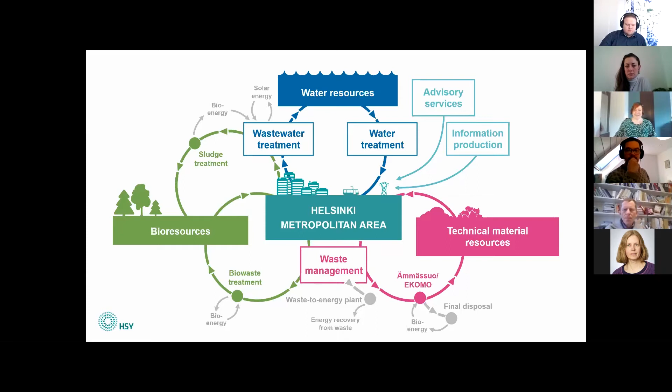The strategy of HSY is to be an enabler of clean and sustainable urban environment. And the most important part from my point of view is that we try to be a forerunner in environmental responsibility and resource efficiency in Finland. And that includes actively taking advantage of new technologies. That's where I come in.

I'm working as the research and development portfolio manager at the waste management sector of our organization. But I work closely with the wastewater management people as well. So we have joint projects, which this is one example of.

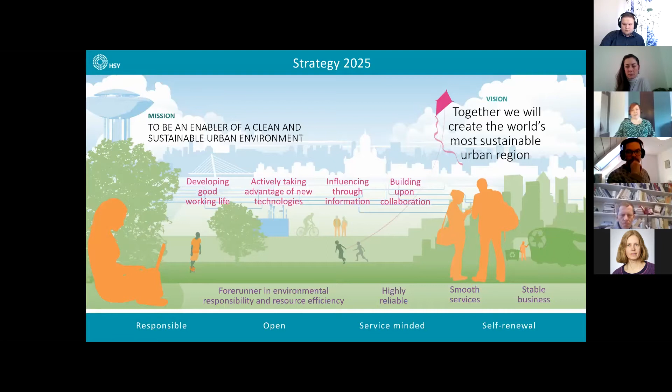The big vision that we have about resources from wastewater is that there's two parts of a bigger project. One part is the Ravita process, which is developed by HSY, and the main goal of the process is to capture phosphorus from wastewater without it entering the sludge.

So the phosphorus is not precipitated in the early stages of the wastewater treatment process as it is usually done, but instead as a post-precipitation process, and thus it doesn't go into the sludge. That's about 70% of the phosphorus, and then 30% goes into the sludge.

Biologically, there's no iron in the sludge in that case, and that's where we come in and we do the pyrolysis to get rid of any pharmaceutical residues or microplastics and so on, and produce a char. But this is all still at the pilot stage, so we don't have a working Ravita process at the moment.

The current project that we are in is going to scale the process up in a smaller wastewater treatment plant in Finland, because ours are quite big and we can't risk trying new things because the water volume is big and we are right at the Baltic Sea, so we are very strict about our limits, and we are very conservative in that sense.

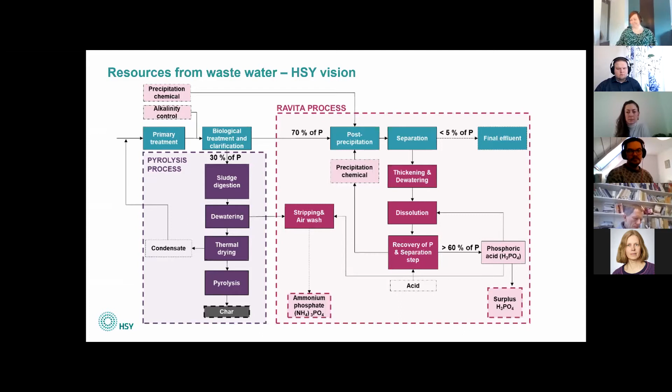Some background on why we went into the project of looking into new technologies. One big issue is windrow composting, which is the normal way of treating wastewater sludge. It consumes a lot of space, and it produces a lot of odors.

Our site at the Ämmässuo Waste Treatment, or Eco Industrial Center, has two municipalities on either side, and they are both growing. So we get more and more neighbors, and when we get more and more neighbors, we get more and more complaints about smells. And we wanted to look into alternatives that would reduce the need for space, and especially reduce the odors that come.

So, more controlled processes for treating wastewater sludge. We started in 2015 with a project where we gave a big shout out, trying to get companies to answer us on how we should treat this stuff.

And we got many answers, of which then 4 were selected for testing. The criteria was that it must be suited for digested and centrifuged sludge, because that was the sludge that came to the Ämmässuo Center, and we didn't want to mess with the process at the wastewater treatment plant.

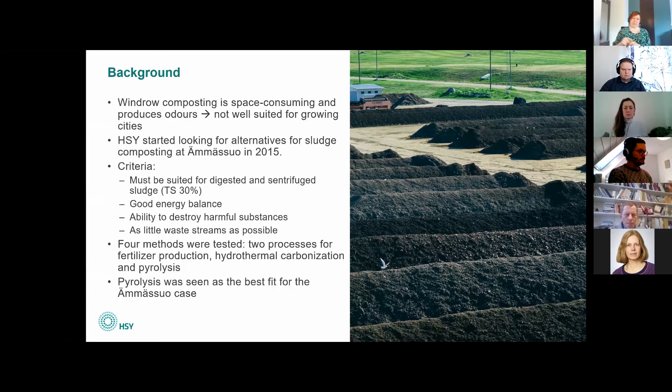So pyrolysis in sludge management, the high temperatures ensure the destruction of pathogens and also organic contaminants. Organic contaminants are things like medical residues, fire retardants, and microplastics.

We don't have any analytical methods yet for determining if microplastics are indeed evaporated from the SludgeChar. We can test the sludge for microplastics, but there is no analytical method at the moment to test the char. But with the temperatures that we use, I am quite confident, and so are many experts, that the microplastics will also be evaporated and then burned with the syngas. As soon as we have a method for this, we will be using it.

The remaining char is mainly composed of carbon and, at the moment, iron. As I said, when we get the Ravita process running, then we won't have that iron in there. There's also quite a lot of phosphorus and then calcium.

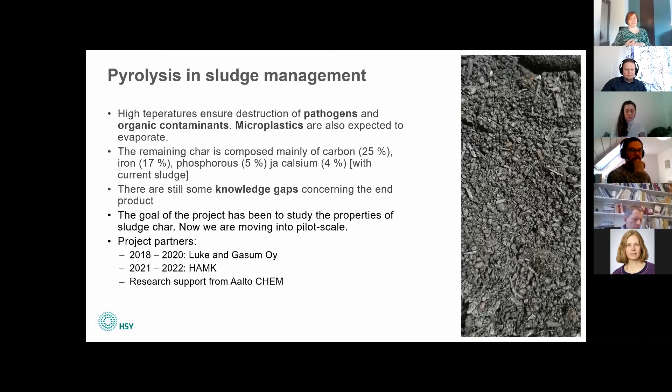In 2019 we did some pyrolysis test runs at the Gasum facility. At that point they owned a small, sort of pilot scale pyrolysis facility in Turku. We tried our sludge and their sludge, and there's a bit of difference between the sludges. We dried them using a vacuum dryer, and pyrolyzed them at two different temperatures to see if there's any differences between the temperatures. We took samples before and after pyrolysis, so we had samples of dried sludge and then the pyrolyzed sludge that we call SludgeChar.

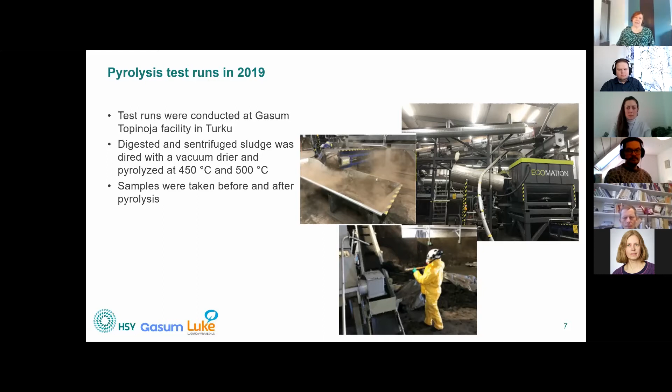What we studied from them was the chemical composition, so what nutrients they had, if there were heavy metals, pH, electrical conductivity, and organic contaminants. Then we wanted to look at the structure of sludge-derived biochar. As we know, wood-derived and other plant material biochar has a very porous structure. We were expecting this not to have as much porous structure, and we know these structures are relevant when we use biochars in different applications. So we wanted to look into that to compare it to conventional biochars.

Then we wanted to look at the sludge-derived biochar as a fertilizer. So if it isn't a proper biochar, could it then be a fertilizer? We were also adding nitrogen to the end product because that will evaporate in the drying process. Then one interesting application for us was using it as a composting amendment. We had tried biochar earlier with good results, and we wanted to compare the SludgeChar to this conventional biochar.

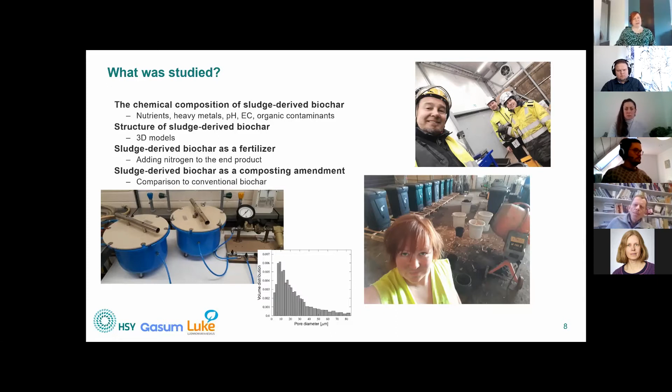With the new EU Fertilizer Act, copper and zinc are quite close to the limit values and exceed them at times, so we need to look into these more closely if we want to use this as a fertilizer product.

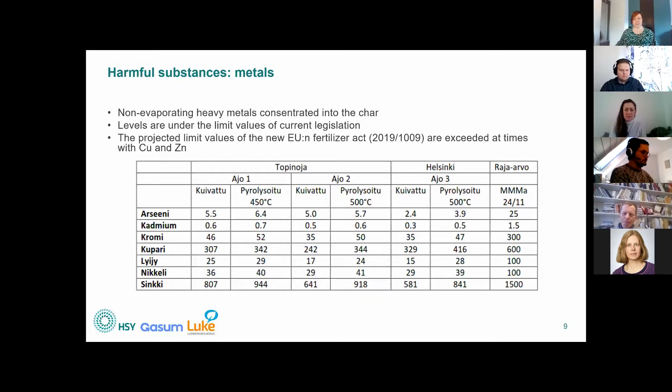For organic contaminants, we tested for 174 different organic contaminants. There was a long list of fire retardants, plasticizers, drugs, pharmaceuticals, hormones, and so on. Most organic contaminants were eliminated or reduced very significantly. As you can see here, BDE and PFOS are examples of that, and diclofenac is here as an example of pharmaceuticals.

That's one of the most concern-raising pharmaceuticals, because it is very bad for aquatic environments at least, and we saw it disappear completely, which is very, very nice. Paracetamol, for some reason, is the exception. It is increasing in concentration with this heat treatment, and we've seen this in other projects as well.

One educated guess I've heard is that when people consume paracetamol, it degrades in our bodies into other products, and these products might, in the presence of heat, turn back into paracetamol. That's quite interesting, but fortunately it's not one of the most concern-raising pharmaceuticals out there, so we're not very worried about it, but it's an interesting outlier that this can happen.

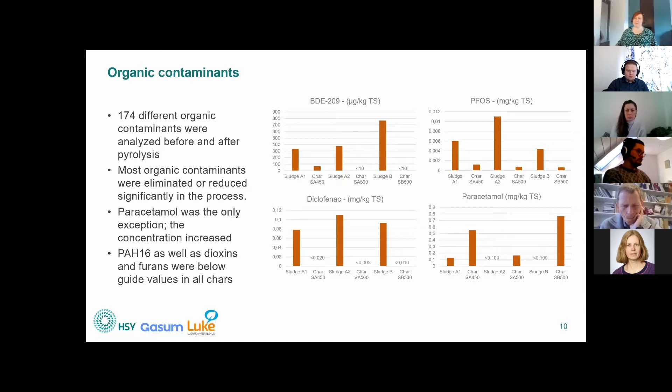Nutrients: phosphorus concentrates into the char, so it doesn't evaporate or turn into anything else. It constitutes about 5% of the end product. Due to the iron in the sludge, the phosphorus is quite low, and the solubility is quite low.

We expect this to change with possible new sludge in the future. At least we hope so, and this is something we're going to test soon, trying to get our hands on some biologically treated sludge with biological phosphorus removal, that we can then pyrolyze and study. Unfortunately, biological phosphorus removal is not very common in Finland, as it mainly works only in warm temperatures, so it can only be used in summer, and it's not as secure as removal of phosphorus with iron substances, chemical removal. That's why it's difficult to find sludges to study, but we have now located some, and we'll try it.

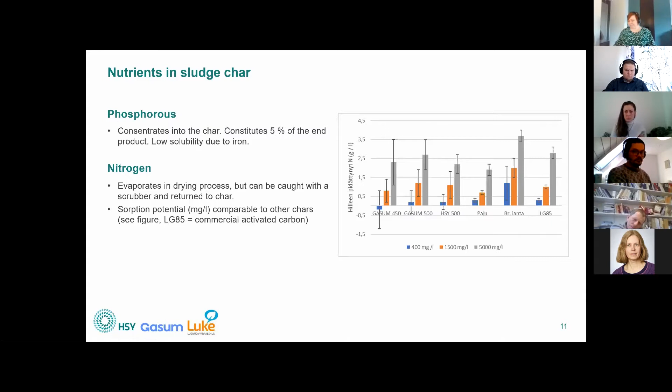Then into the structure. As we expected, the porosity of the SludgeChar is quite a lot smaller than the porosity of wood-derived biochars. You can see in the picture, Lietehiili is SludgeChar, and Pajuhiili is willow char, and you can well see the difference for yourselves there.

The surface area of chars is a crucial parameter for many conventional uses of biochar. If we're using it, especially in the composting process, where bacteria use all these holes as their homes and grow there, then SludgeChar is obviously in a negative disposition there. Water holding capacity is another thing—with this low porosity, the water holding capacity is of course also smaller.

Here in the picture there's the pore diameter, but then there's also picture B, and there you can see that the pores in SludgeChar were actually these sort of balls. We're thinking this is because of the water evaporating and leaving these holes, so that might be due to the drying process. It was a vacuum dryer, so it might have created small explosions of water inside it, leaving some ball-like structures in the char. We now have a different drying process, and I hope I can get new, similar pictures to see if that affects the structure.

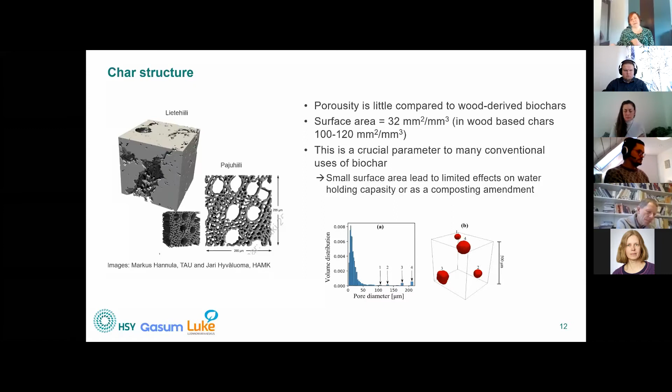And then what we are doing now is looking at SludgeChar in anaerobic digestion of biowaste. We saw that composting the material is quite dense, and it can create pockets in composting that are sort of anaerobic.

And thus this might be a better use for it. We have done some tests, and the results so far are promising. It seems that SludgeChar has a stabilizing effect on anaerobic digestion of biowaste, because biowaste is really nitrogen rich, and it's not an easy feed for digestion. These processes are quite prone to collapsing for different reasons.

If you drive it too hard, it can collapse easily, and it seems that SludgeChar is actually helping the process to keep stable.

It also does seem to have an effect on the end product. The fertilizer that comes after the anaerobic digestion - it seems that the nitrogen in the end product is more readily available for the plants. You can see the salad on the right there, and the third from the left is the SludgeChar version. As you can see, the roots of the salad are quite a lot better compared to the control with no fertilizing, then there was biowaste digestate without the char, and then a commercial fertilizer as a control as well.

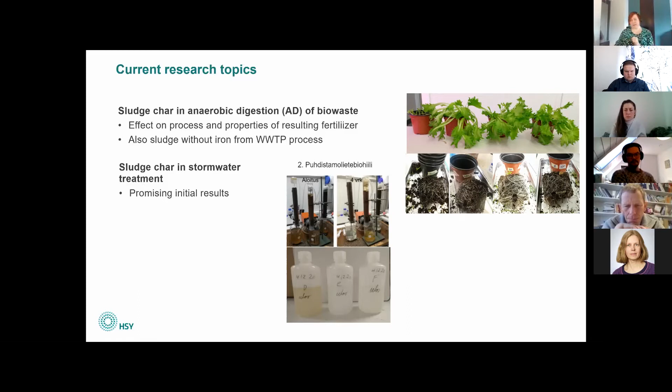And now to the pilot facility. In view of promising results on the chemical composition of SludgeChar, we are confident that this is a good technology for us, and we are now piloting it. We have built a pilot plant, which is about 10% capacity of a complete plant that we would have.

What we want to do is first of all secure the operation across the whole process, because drying of sludge is one big question mark - what the best technology for that is. And then, of course, there are a few sludge pyrolysis plants already out there.

But now with this design, we wanted to get a design that's not screw-based, but is actually a drum reactor, because that we can scale up more easily. If you have screw reactors, scaling up is basically just putting them next to each other, and we'd need at least, I think, 7 reactors to cover the need for treatment that we have.

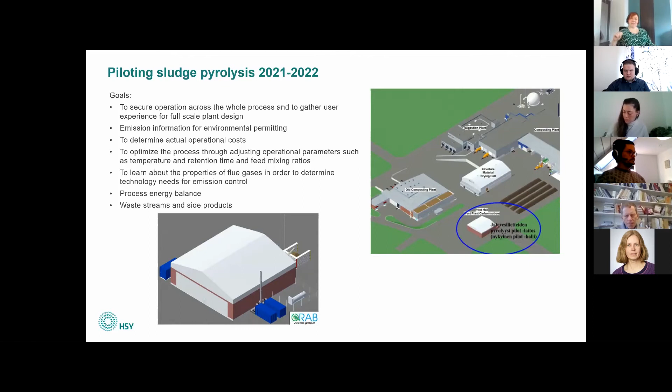Here's a closer look at the plant before we watch the video. It starts with numbers 1 and 4, which are bunkers - 1 for sludge and 4 for wood chips. They are mixed and conveyed to number 6, the big blue thing, which is the belt dryer. They slowly move through the belt dryer, and once dry, go into a buffer hopper, or buffer silo, number 9, and from there to the actual pyrolysis reactor, number 11.

There the syngas is then burned, and there's a thermal oil system that captures the heat from the incineration of the gas and transfers that to the drying process.

And then in the end, the char is quenched with water or the ammonium sulfate that we get from cleaning the air of the drying process, and then stored outside in a storage pit.

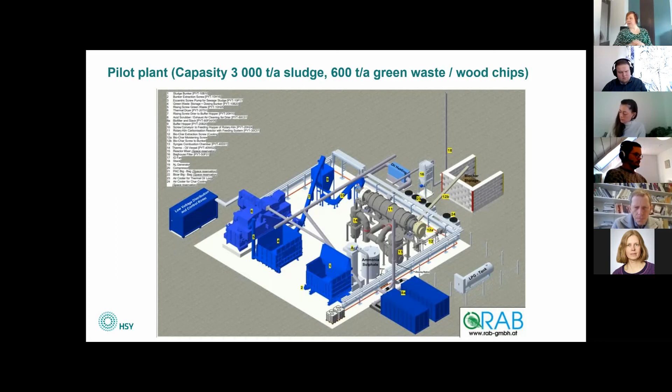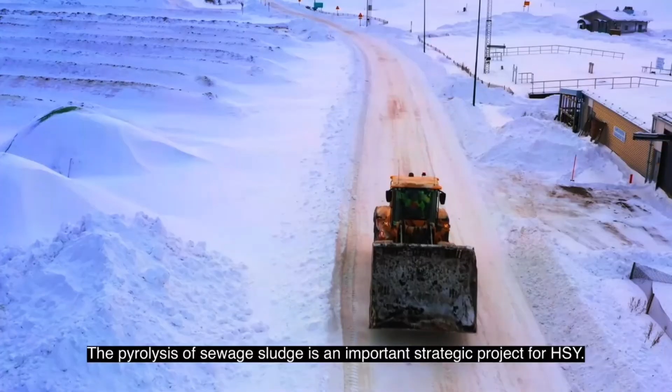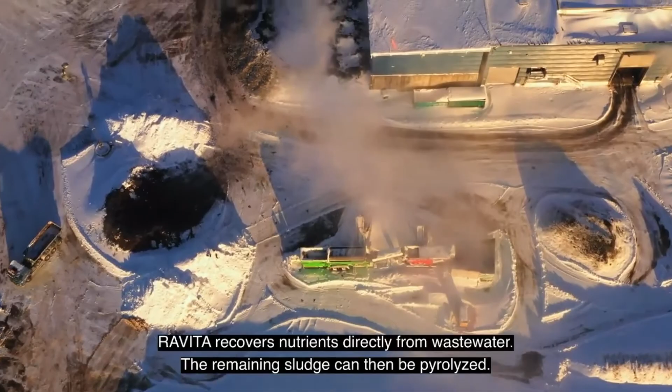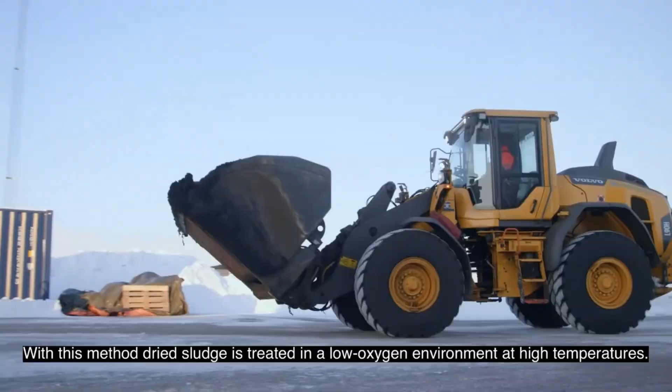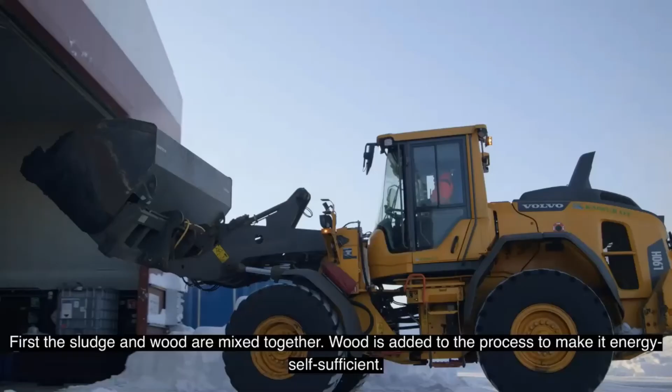Household side streams are resources we cannot afford to waste. We at HSY are developing innovative methods for utilizing the nutrients and carbon from municipal wastewater to enhance circular economy. The pyrolysis of sewage sludge is an important strategic project for HSY. Together with RAVITA technology, HSY has formed a concept where nutrients and carbon from wastewater can be recycled more efficiently. RAVITA recovers nutrients directly from wastewater, and the remaining sludge can then be pyrolyzed. We have built a pilot plant at the Ämmässuo Eco-Industrial Center to test the pyrolysis of municipal wastewater sludge. With this method, dried sludge is treated in a low oxygen environment at high temperatures. The pilot plant is used for optimizing the process, its energy balance, and the production of a high quality end product. First, the sludge and wood are mixed together.

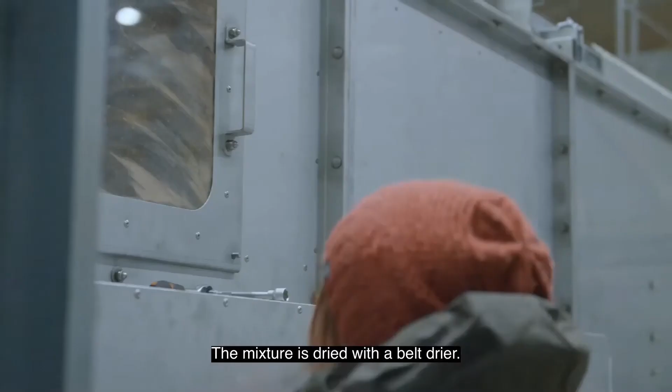Wood is added to the process to make it energy self-sufficient. The mixture is dried with a belt dryer. The exhaust air from drying is led to an acid scrubber to capture ammonia and then to a biofilter to

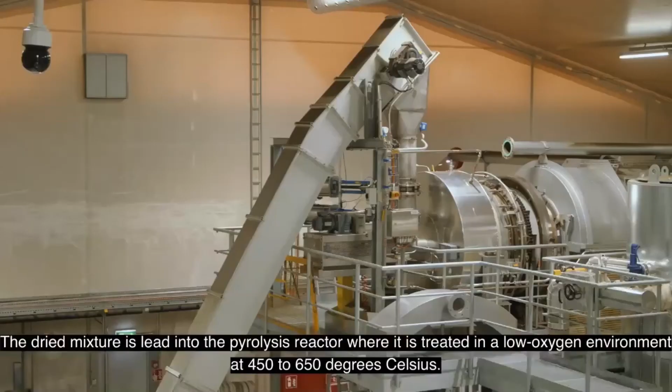remove odors. The dried mixture is led into the pyrolysis reactor where it's treated in a low oxygen environment at 450 to 650 degrees Celsius. The pyrolysis gas formed in the process is burned and the resulting heat is used in the pyrolysis and drying processes. The flue gases are treated according to official requirements.

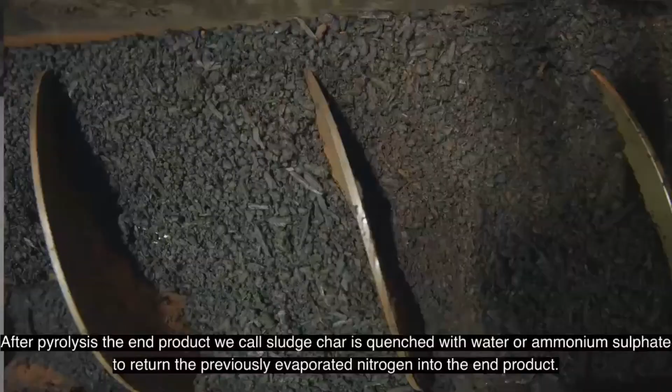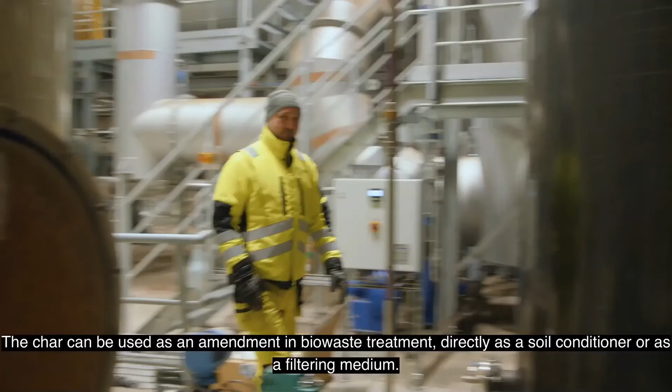After pyrolysis, the end product, we call SludgeChar, is quenched with water or ammonium sulfate to return the previously evaporated nitrogen into the end product. The char can then be used as an amendment in biowaste treatment, directly as a soil conditioner or as a filtering medium. Char from pyrolysis is chemically very stable.

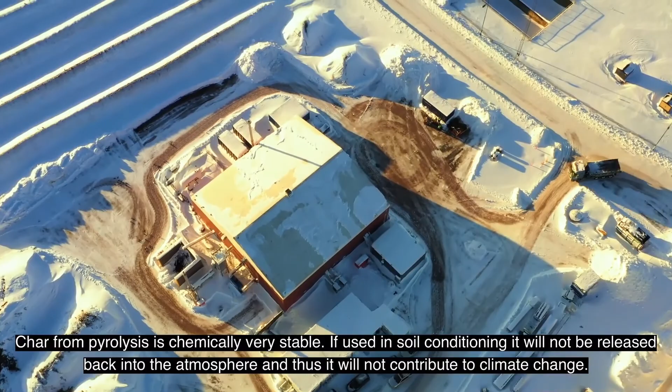If used in soil conditioning, it will not be released back into the atmosphere and thus it will not contribute to climate change. We work together with many different research organizations. We studied properties of SludgeChar and possible new applications for its use. Cooperation enables us to be forerunners in our field.

Great, I guess it's now time for questions. Julia, would you like to continue, Aino, still, or is it time for a question? I don't need to continue.